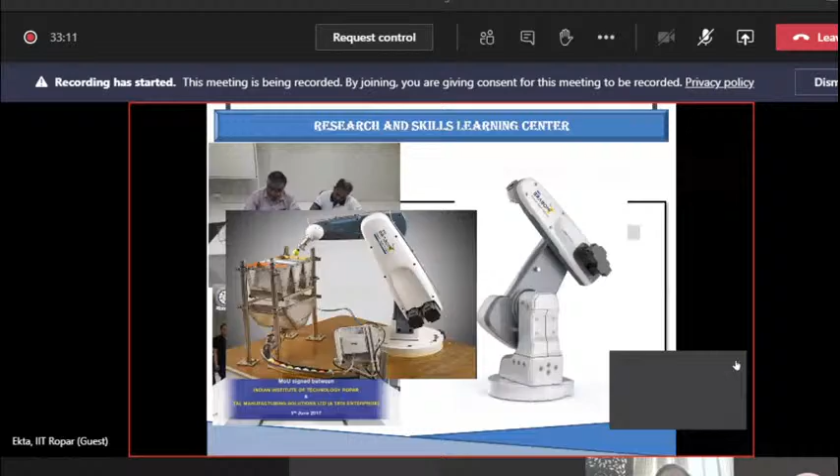So just one second. This will be a part of it, and this is what we'll be discussing for today's topic, and that is related to non-repetitive tasks. Because till now, I'll just introduce that normally robotic manipulators for the last four or five decades, if we are not taking only Indian robotics into account, had been started mainly for repetitive tasks, right?

That is one of the reasons. But now for customization, for non-repetitive tasks, for flexibility to be incorporated, which is related to Industry 4.0, there the importance of modularity is there. This is what we'll be discussing in detail. And I also work with hybrid manipulators, and have just started working on intelligence, whether artificial intelligence can be incorporated in all these projects. So this is some research direction, and just one or two videos.

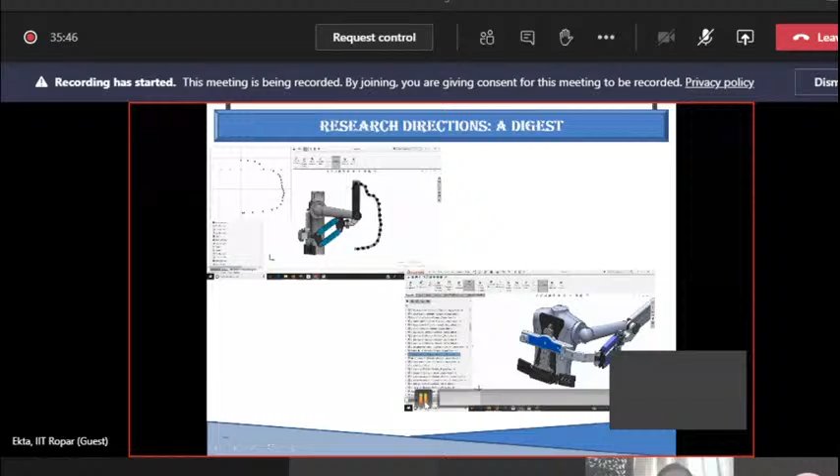And to introduce today's topic in a better way, before going into the introduction part, I'll just show you a glimpse of very recent work being taken up by my PhD student. My first student passed about 3 years back, and he started with modular robotics, and now he is at the University of Leeds, settled after his two postdocs. Then it was taken up by Anubhav. In between, other PhD students are working, because presently I have 6 or 7. But this was started with my first PhD student and now Anubhav is almost closing it.

I'll show the complete video at the end because we'll be talking about it first. But this is all in serial manipulators, so this is not related to hybrid yet, but how we can actually work with it. So I'll just show you some glimpse of where we'll reach today. So in the beginning, yeah, here.

For example, if there are some unconventional parameters, then we can always look for some specific customized robots and how we can make them. So this thank you is actually after this entire video, but we'll come to that. This was just to show you the glimpse of that particular video, which you can understand and admire in the last. So to begin with that,

let us talk about where robotics started from. In all our very established books and definitions, we talk about the repetitive task being one of the basic features where robotic tasks in manufacturing had been started. So you can say particularly Industry 3.0, where it's not that Industry 1 or 2 didn't have automation, but Industry 3.0 was particularly related to robotics research, that is, robotic manipulators which came into manufacturing.

And particularly the reason was that if we have some very difficult tasks, dull repeated tasks, something which is extremely dirty, unhygienic, or dangerous, for all those things, using manual manpower for such repeated tasks was not so recommended. And there came the importance of robotic manipulators, which all of us know as industrial robots, be it welding or repeated pick and place.

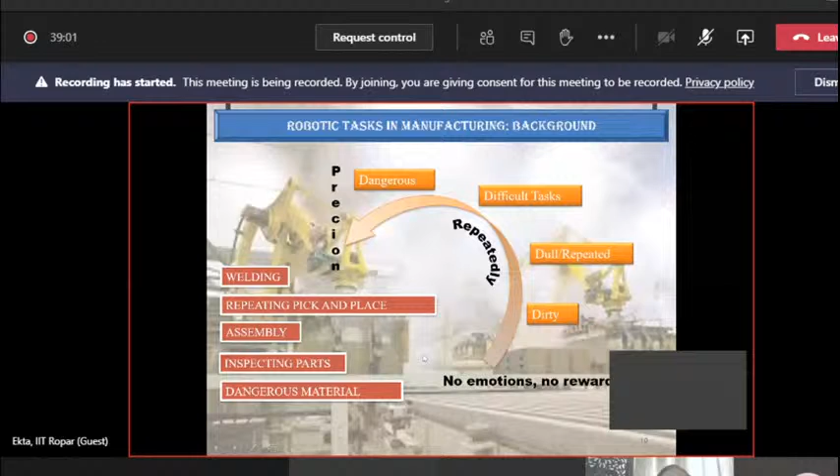So this is now textbook stuff, from four to five decades back, even more, outside. But for India, in the automotive sector particularly, it had been started long back, and we had imported enough robots. But I must say that even seven or eight years back, when I had a very good gathering at the beginning of my robotics platform, I'll talk about it, if you talk about Indian robotics on the global map, now it is increasing, but the relative number was so small that many people called it zero.

I know that starting from IIT Delhi, Madras, IISc, Kanpur particularly, and then Guwahati, we had many very good labs working. I am talking about a decade back, but still it was considered zero because the number was so small. And then I can use the word exponential change, and many people, many labs, be it startups or big projects or small projects or industry, have come forward now. I'll be talking about Indian robotics also for a few minutes in some time.

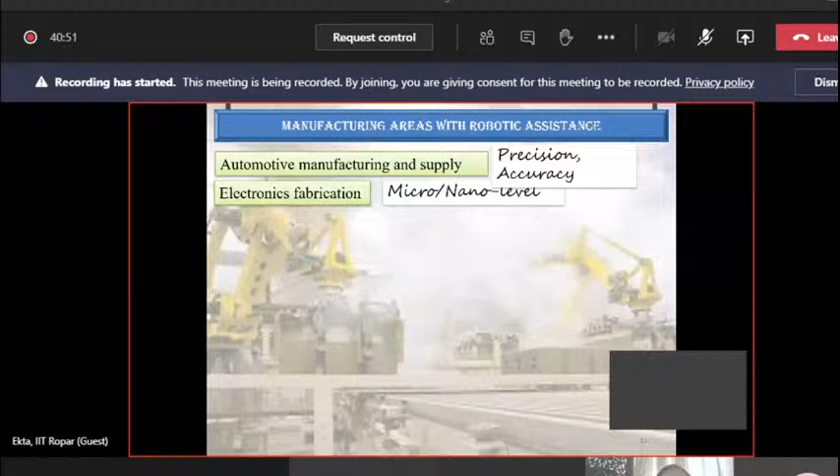Before that, just to introduce more about robotic manipulators, because today we are talking about serial manipulators only, for which during this entire course you might have learned about kinematics and dynamics. But why was it important? Because many manufacturing areas which need robotic assistance have different reasons. The automotive sector had started long back, and then came electronics fabrication, where precision was required to micro and nano level. Precision and accuracy are not the only reasons. I'm moving from repetitive dull tasks to other reasons which make the efficacy of robots better.

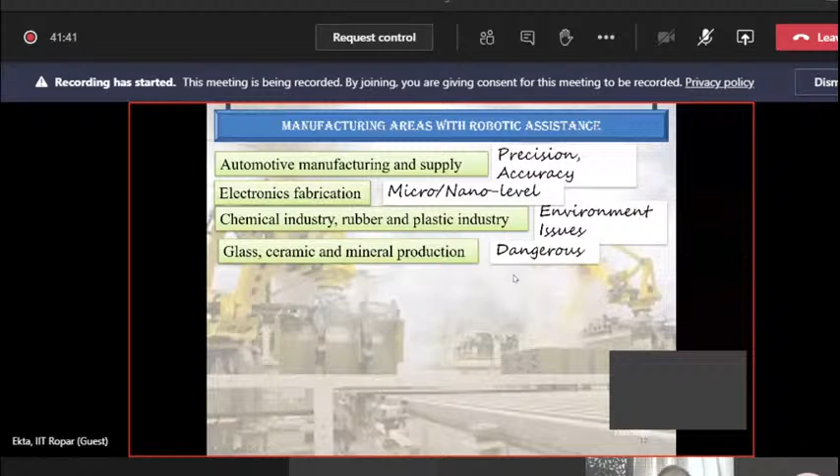So here you will see chemical industry, rubber, plastic, even very small firms; in fact, these days small and middle scale industries are also looking for robotics, not only for automation or precision, but for environmental issues, dangerous issues, for example glass work. And ceramics, these days robots are not being used only for danger, there are other reasons, equivalent to what I'm saying for wood and furniture: unconventional designs. This is another important aspect related to wood, furniture, glass, ceramics.

There you will find that you can go for unconventional processing using robotic arms, and that is the latest. I'll show it in a better way. Apart from that, hygienic and germ free, for example in food, small firms, everybody would like that rather than going for manpower, the human skills can be used better, and to utilize robotics.

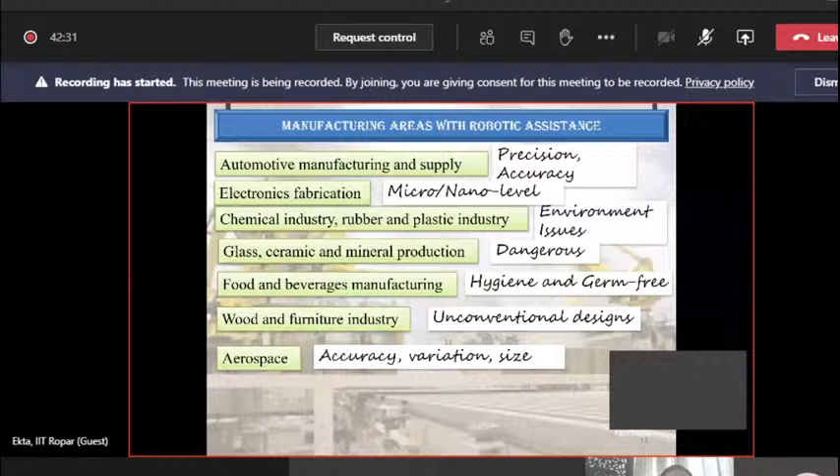So wherever actual food work is going on, that better be done in a hygienic way. The importance of robots you have seen in our present pandemic is huge. So what applications are robots in use today?

That is why I'm saying we should know and encourage Indian robotics. Apart from warehouses, not only mobile robots but mobile manipulators are being used. I'll show you the glimpse of it.

But other areas include assistive devices, maybe in building works, which is getting normal at places. It's not yet so normal in India, but you will find it very soon. And medical - you know it is being imported, but the utilization of robotic arms in medical has been seen by all of us. Then comes defense, service, and agriculture.

I have not shown my work in the last 2 years. I'm working in agriculture also, particularly in vertical farming. There also the idea is to use modular robots where, according to the different requirements of agriculture work in vertical farms, the location and space is less and the environment is constrained, so you need a customized robot, with the same idea and background requirement knowledge - just the application gets changed.

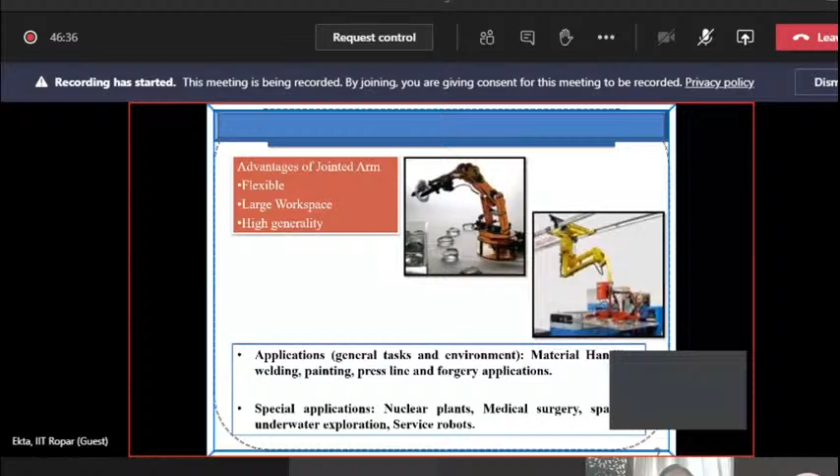Because now, with this introduction on repeatability, I'll explain what is meant by non-repetitive task and the importance of reconfigurability - that is what we'll be looking at. This is just the definition we had covered, and I would like to start from the concept and significance of reconfigurable manipulators.

The idea is that whenever we talk about a robotic manipulator, what is common in all these applications is the structure. You have already seen that your understanding of transformations, frame fixations, forward kinematics, and inverse kinematics shows that we can always design these multi-body systems in a very systematic way - first you see what is required, maybe given some 3 or 4 points.

You'll say you need a robot which should have - maybe you don't know the task, but maybe you know the DH parameters or specific parameters. Some people go for only Euler parameters, or Rodrigues parameters, or whichever parameters you use to define your frames. Normally used are DH parameters.

I'm sure all of you have already studied this and have hands-on experience with it. So what DH parameter does - it's a convention given by Denavit and Hartenberg - that convention is just to introduce or define our frames.

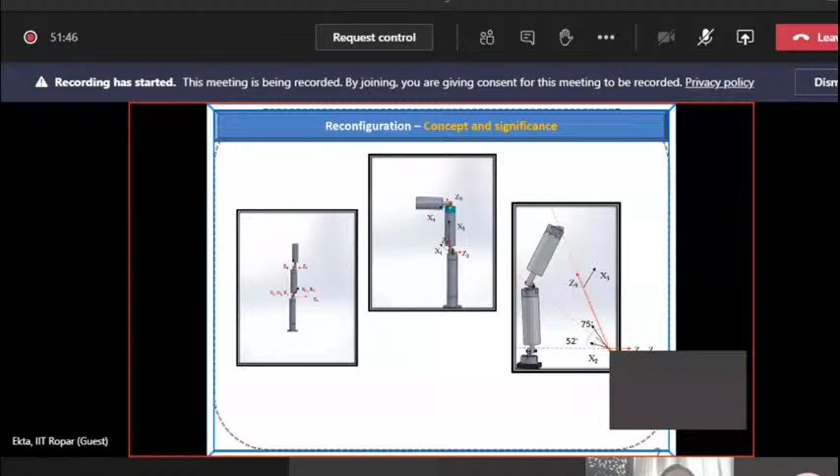Apart from that, I've also worked with cases where the connectivity between the Z axes or the twist angle is not 0 and 90 - that's what I call unconventional. I'll come back to this point. This was just the introduction - we'll be talking about how to get unconventional modules for any manipulator we want. But before that, I'd like to introduce many other modular robotic manipulators given by different industries and groups.

So they give us a modular library with active components and passive components. From the 90s this concept of modularity existed, but normally people from an electronics background were using it, and the sizes of these PolyBots were very small, so there was hardly much role of mechanisms - the heavy duty robots were not involved.

So similarly, M-Tran - these are just some of the options how people have tried their hands at research in modular robots, because this is the Atal course in which it is being mentioned for robotics research. That is why I'm showing this factor. Sometimes, just for the introduction of modules and my work, I skip it, but for this group I am showing it and some of the concepts, because then, even if you are from mechanical engineering, electronics, computer science, materials, or biosciences, you can connect yourself depending on your background, and see how you can contribute or work in this area if you like it.

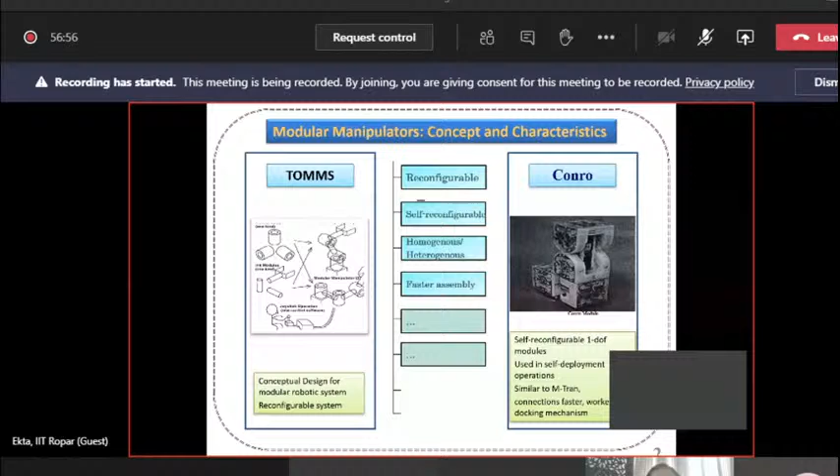Another aspect is whether the assembly is fast or slow. This is particularly related to self-reconfigurability, and whether it is self-repairable. For example, in Sambot, the modules are very small - equivalent to electronics parts - and only that much is required, and they can turn themselves and connect at any orientation. So if it has six faces, at any face it will connect to another and form a new shape, which we call a new configuration.

And then which part can be helpful in moving, which part can help even with stairs - if you want stair climbing, such modules people have worked on. It's not that they are ready, but this is another research direction, particularly people in electronics prefer this. And the controller, and more importantly the algorithms used for understanding the configuration it presently has, and the controller accordingly. So this kind of background work is required just to introduce to you the research robots in this area. Multiple modules can be attached.

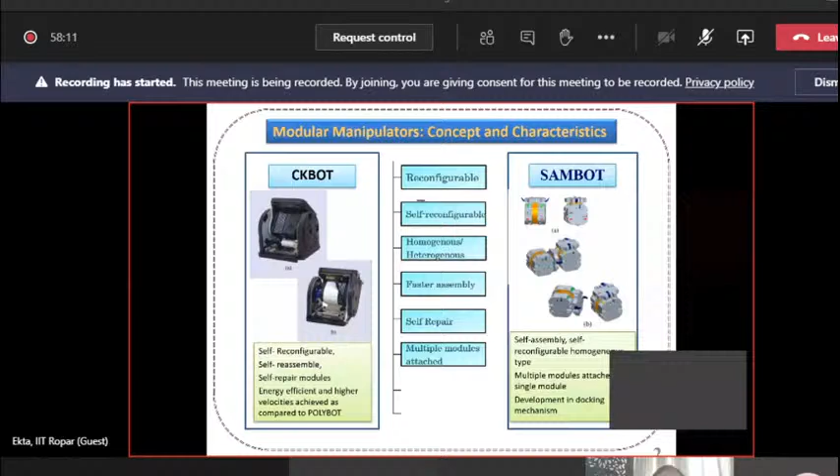So these are a few of the aspects in this concept of modular robots. And one of the other aspects, as I said, the last one I have added, is the degrees of freedom. Till now we were talking about each joint being 1 degree of freedom. Normally in our serial manipulators also, we assume that we'll take every joint as 1 degree of freedom.

But here you'll see that in this SuperBot concept, each joint or each particular module which they have made itself has 3 degrees of freedom. But increasing the degrees doesn't always mean good. So my point is, if required, this is another example.

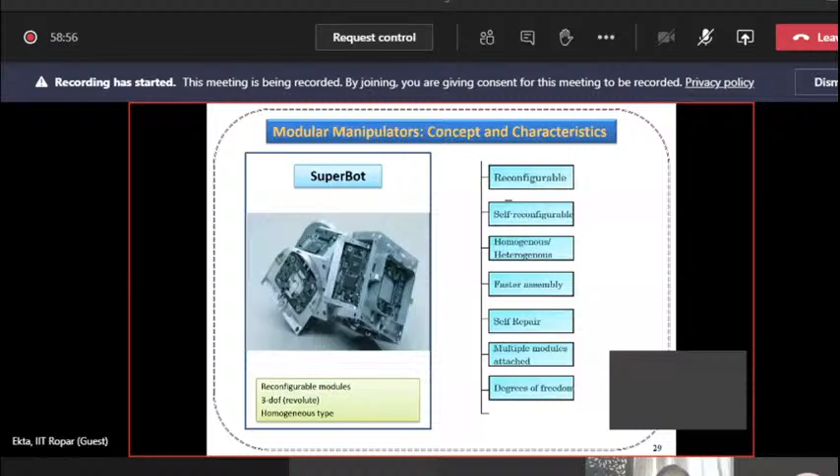Okay, so what is the importance of robotic arms, right? Why was that required, and the introduction towards my work. As I said, this was all to show you that it's not a very recent concept, even from the 90s. So this is coming from more than 2 decades. But what is recent is from the last 1 or 2 decades, particularly in heavy duty robotics.

As I said, all these were small in size, because the moment you have heavy duty, you can say, okay, there is a large link which is carried by another link. You have to think about all the inertial forces. In fact, when we are talking about dynamics, I don't know the way you had already taken the lectures, but by the fourth day you might have got introduced to dynamics.

A small change here or there in your masses completely changes the dynamics, and then how can we talk about configuration, and who will control it, who will write the dynamics, who will write the new kinematic model of it, right? Everything needs to be written again, and that too automatically. Only then it is reconfigured. It's not that you can just put the components in a different pattern or order, but you have to take care of all this modeling, be it kinematics or the dynamics of the system.

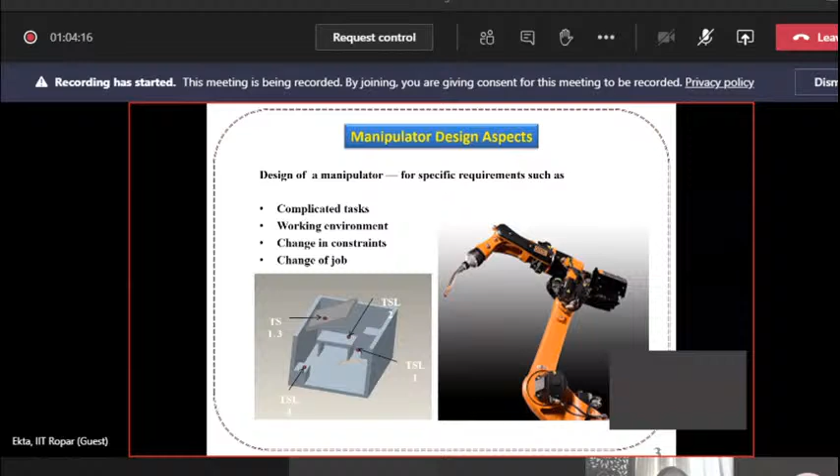So this is another example of the same design for cluttered environments, and you will find realistic environments here at the left side. I'm showing you this just because this was all from the lab work itself, taking the structure or the environment of the lab itself, one portion of the lab, as the example, right?

If we say we have modeled this, in fact, these days, one of my works is related to the modeling part of it. I am connecting this work with people who are working in computer sciences and algorithms, because of how to convert the videos or the pictures taken from the camera, in picture form or any frames, right, into the model as required for these 3D models directly.

That is, I'm not talking about going from scanning to the model. I'm talking about going from the frames, the 2D frames, to 3D modeling. So these algorithms are there with the computer science guys, or even my student who is not from computer science learned those, worked very well and associated this to our robotic system. That work I'm not presenting, but I'm saying how your learning can be utilized in this area.

So here, for example, this model we prepared long back, about a decade back, but now we are making such models not by simply calculating the dimensions and then going for assumptions. That particular part can be skipped by utilizing advanced technology to convert in seconds, or maybe minutes, or maybe half a day, depending upon the complexity of the environment.

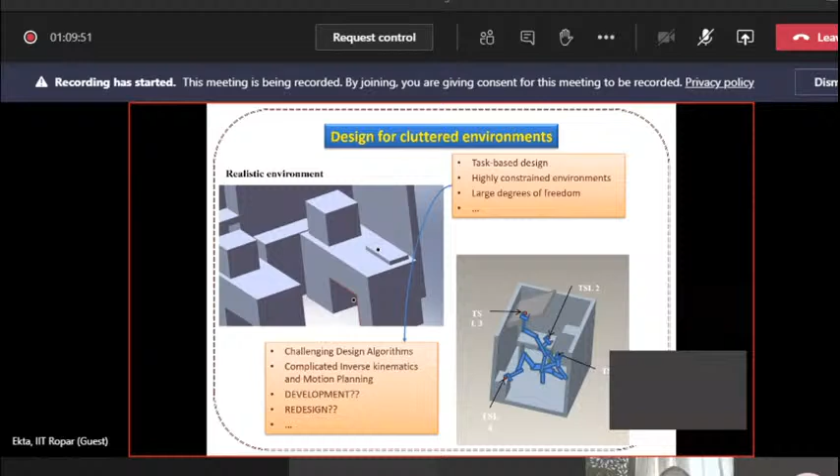So this is where I would say the importance of a library being developed in hard form, I mean not the simulation, which will correspond to what is being designed. You should be able to use those modules which are present in the library and actually make the prototype ready. So this is all the concept, and this is where I would say that particularly you can break.

Now, modularity doesn't mean the entire module can be developed once. You can talk about the library having different parts. You can actually further connect, break it. So these are just to show you how and what parts will be considered the individual parts, the components of that library. That depends upon, again, the requirement and the flexibility which we would like to incorporate,

because we also understand that there is a trade-off here, that more flexibility may hinder the rigidness, or it may not be as stiff as required in the industrial arm. So we are not saying for very heavy duty you may need it. There is a trade-off here, and so this was just to give you a few concepts, particularly related to the introduction and the requirement part of robotic arms, why modularity is being used.

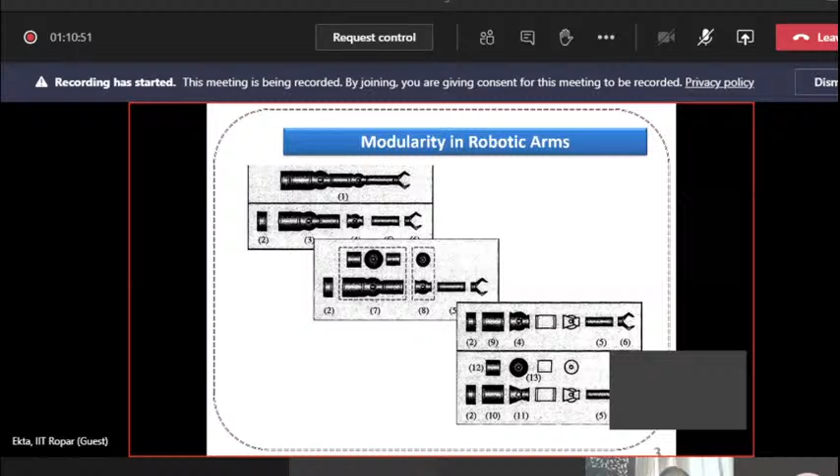So before going further, I would like to take some questions, because I've gone a little faster. So before going to another part of it, may I ask how did you find it, and if it is connected to you or not? Because I have a lot of time, I can always ask my audience if it is going okay. Yeah. Shall we ask for some questions? Am I audible?

Yeah, Dr. Ashwin, first of all, may I know if I'm audible, because I'm sitting in a room and I don't know. Yes, ma'am, you're audible. Okay, all right. So that means at least I can go further if there is no question.

But you can relate it to your work. It's not that the question has to be from this work, but you can also talk about what particularly you are doing, and would you like to connect it to that? Only then this version of mine will be useful, because I'm not giving any details of how we have done it, but what you have covered in the last 3 days, maybe that will be utilized here, right? And as I said, it is important because of possibility, and if we are talking about possibility, then many questions come. But if there is an interaction required, anybody who's getting any question in mind.

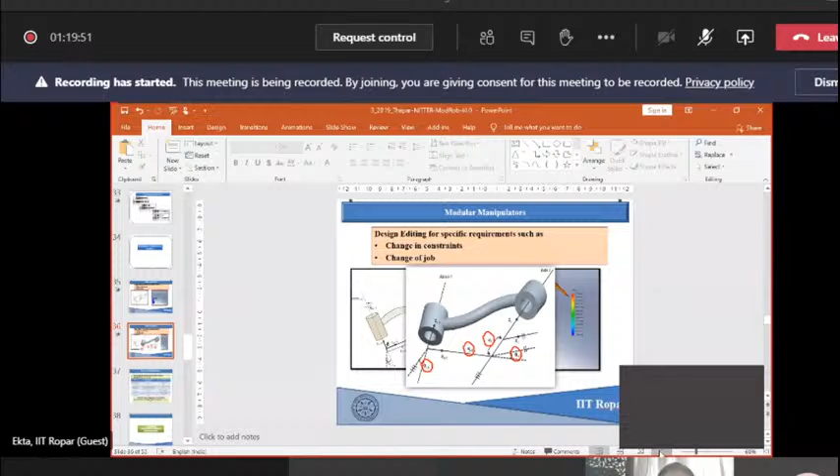So I just go back one or two slides. It's good that I spoke mostly about these DH parameters. Okay. So we were here, and what we talked about is the same, and which you have understood, that particularly for changing the configurations, it is important to see whether it is really possible or not, because we talked about many things. We talked about the requirement that wow, it will be so nice to have a new configuration, but will it really be possible? And to talk about that, we showed you this particular design editing.

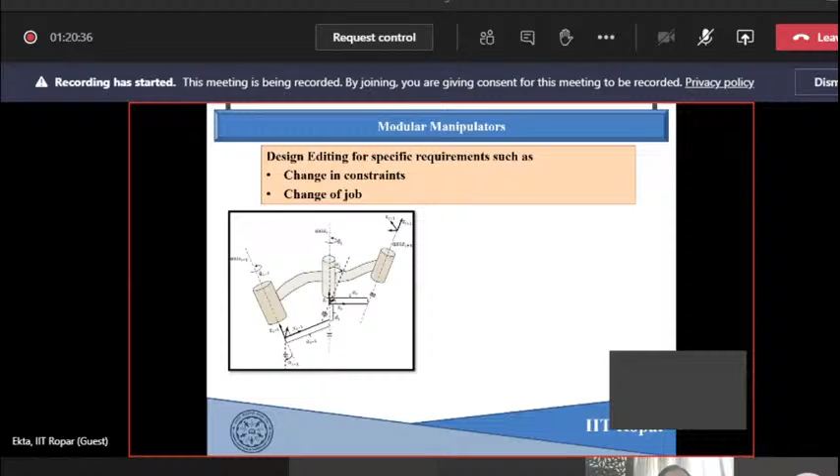And here you will see that in particular to make any robotic arm, for example here at the right side, as I was talking about these 8 degrees of freedom, right? So this 8 degrees of freedom robotic arm, we just made it, and it's easy to simulate, at least till simulation. And we assume that some similar or corresponding library is already developed, right? And out of that library, many people are working these days, even on modules people have started working, but the idea is how you have designed the modules.

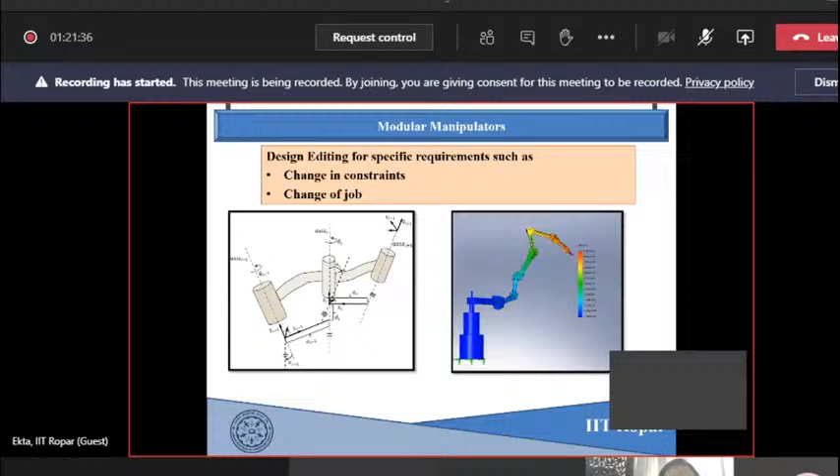So the possibility means first is kinematics. First is the kinematic part of it. That means if I can give the modules which can get connected to each other, right? To give the DH parameters, now I'm confined to the DH parameters only. And of course, you can develop, as I said, for other parameters also, right? But these are generally being used, so we can talk about this. And if we see the DH parameters, then the DH parameters are these four, right?

And in this, say, alpha as being marked, and a, which are link length and twist angle, they are talking about how any specific axis is associated to the next axis. That is the consecutive axes for the two joints, how they are connected. What is the definition of one with respect to another? So for that, you use the distance between the two as well as the angle between the two with respect to the x-axis. So there is a specific convention which helps us to define the two axes.

Similarly, your joint offset as well as the joint angle. This helps define how the x directions of the frames, x i minus 1 and x i, are associated or defined with respect to each other. So these four parameters help us to define a complete link with its joint with respect to the next link or the link prior to it.

So if I can create the modules, say this picture is not for the modules. This picture is very common where people learn DH parameters. You might have already done it recently, right? Or even long back. But if I say this is my module, although this is not so nice because it cannot change, it looks very stiff and rigid. And if today I say that, you know, whatever is this alpha, the angle being shown here, and I... arrow option. Okay.

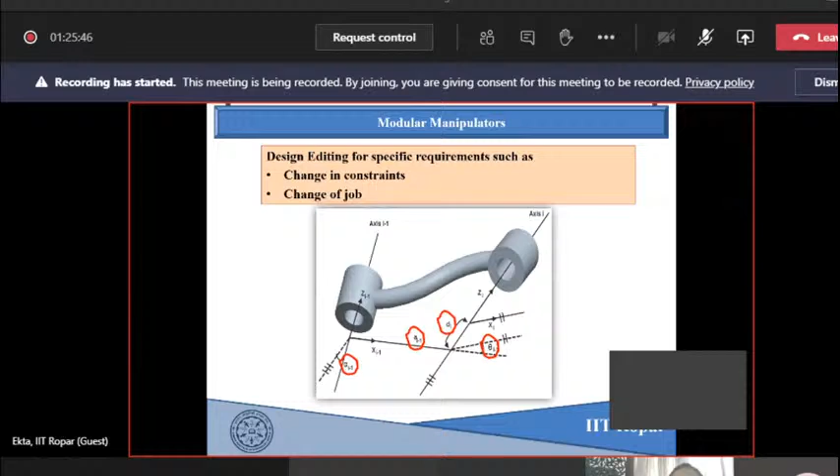And all these things come into the picture when you start working on the statics and the kinetics of the system, because the static force or the dynamic force balancing, everything gets changed the moment you make a slight change in the dimension, or the complete formation. So how to handle it? There you will say that flexibility should be minimum, and we found that only by playing with alpha we get enough of such modules. And some other works, just the key points, or some other ideas about modular manipulators, I'll show you.

If we are talking about the conventional and the reconfigurable, at least from the kinematics part of it, why are we talking about reconfigurability? Again it's the relation with the requirement. With conventional you have some specific configuration fixed for you, and in the second you can change the configuration according to the DH parameters. Then the first thing you get is that yes, reconfiguration is possible here, and in conventional you have to change the complete robot, right? It's a fixed configuration, so it's not possible there.

I'm talking from the perspective of why it is trade-offs. It's not that okay, we should switch to the reconfigurable. No, you cannot, right? Overall mass, normally, unless you get into further research on maybe materials, or on actuators to make them lighter, right? Because if lighter actuators are being made, that means even the conventional robot can be lighter in weight. But overall mass normally for the reconfigurable will be larger.

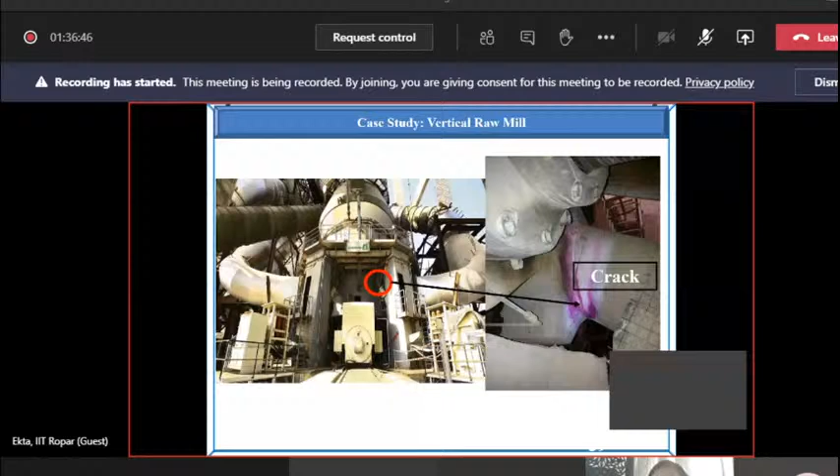But the point is, if we have a library ready, it can always be adjusted on a hydraulic lift, as I'll show, and the manipulator part can help work in any such direction. So the customized manipulator needs to be developed according to the given task, and there were two tasks there, the crack at two locations.

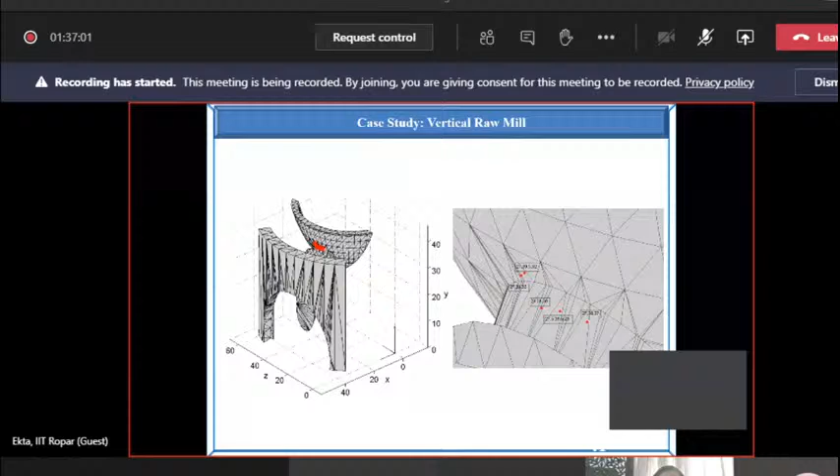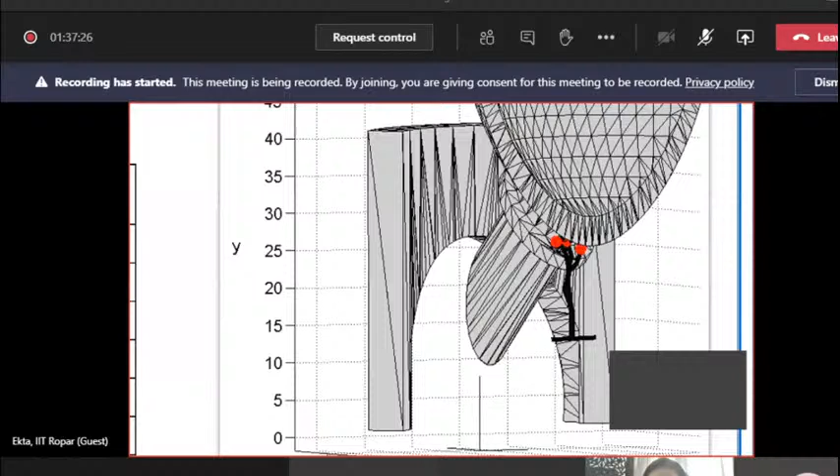At one of the locations, these are the DH parameters we get. You can see these black lines being shown, zoomed in because it was a very large profile of that particular location. In front of them, the robot being designed is already at height, and there were red marks showing the locations where the robot needs to work, and the DH parameters which should be helpful. You'll see alpha, A and D values coming up, but who will understand it like this?

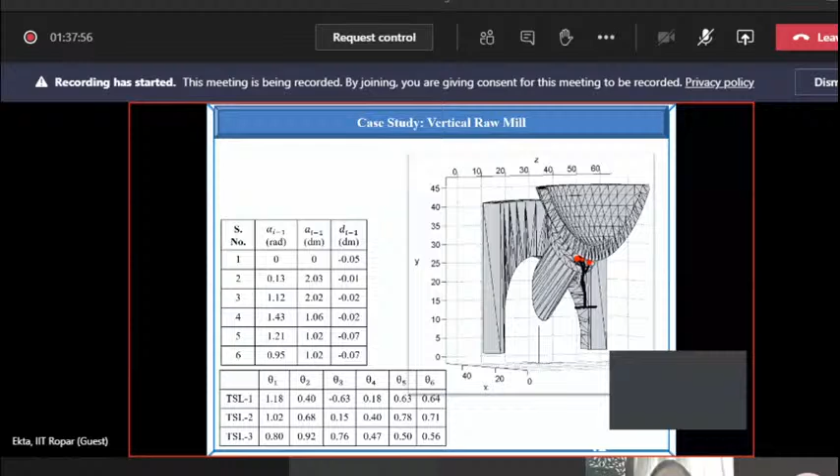When working at the front side, the requirement according to complexity was different, and when working at the back side there were further constraints. Because of these further constraints, you need extra degree of freedom, and that is why at one you have one configuration, and at the other side another configuration, and they can connect. I'm not saying today's technology is so developed that quickly it will be connected, but with better research, we have already developed such modules which can be connected.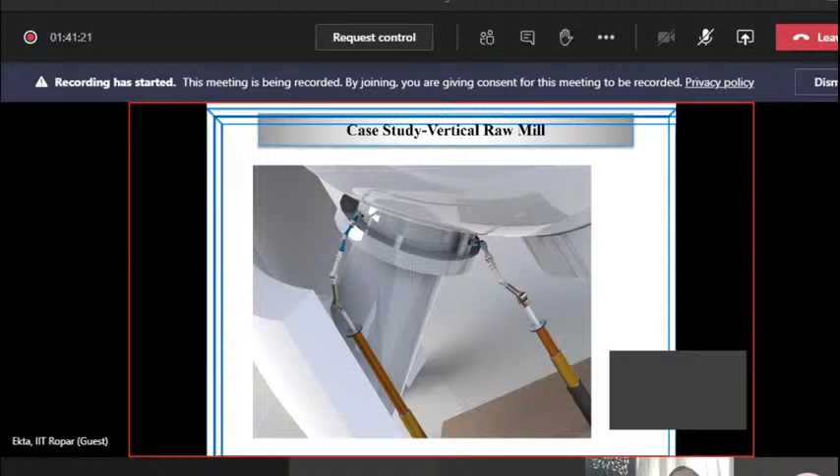So this is about the introduction of the modular robots. But now I'd like to cover a little part from its connectivity, because whatever I've spoken, all those terms are the takeaways for today. But this is how it's connected to Industry 4.0, because as I said, robotic arms to begin with were associated with Industry 3.0, but now with this new era already here, what is the meaning of modularity?

So whenever we are talking about cyber, with that we have associated the cyber physical systems. It's not that current research is only in the algorithms. Mainly in industry, what you need is adaptable algorithms to connect the processes or their inputs and outputs, with respect to controllers as well as everything from a distance.

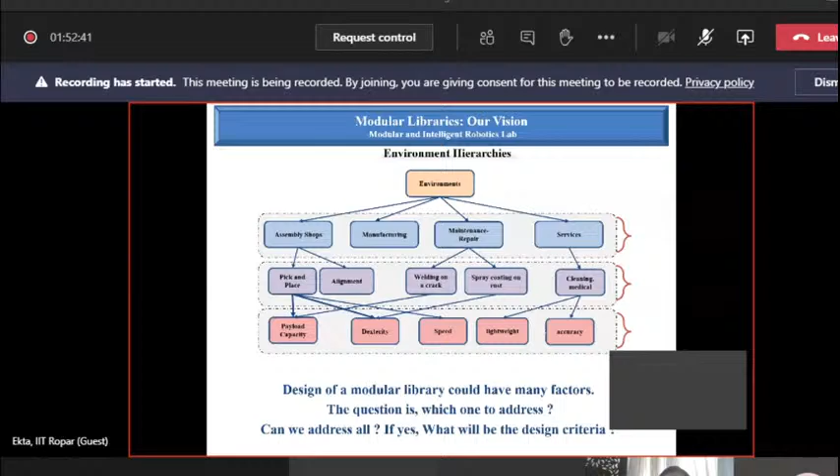And now I show this video, which I told you about, almost everything I spoke of. In just a couple of minutes you can see this, because this is from our recent work using the Robot Operating System, the ROS environment.

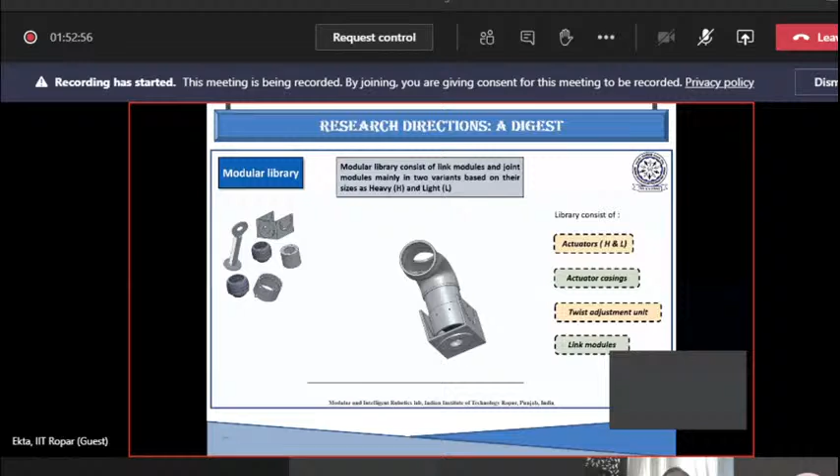I'm sure you know it, but please train yourself and your students on ROS. We are also learning, and we are arranging different workshops for ROS, which is required for global working.

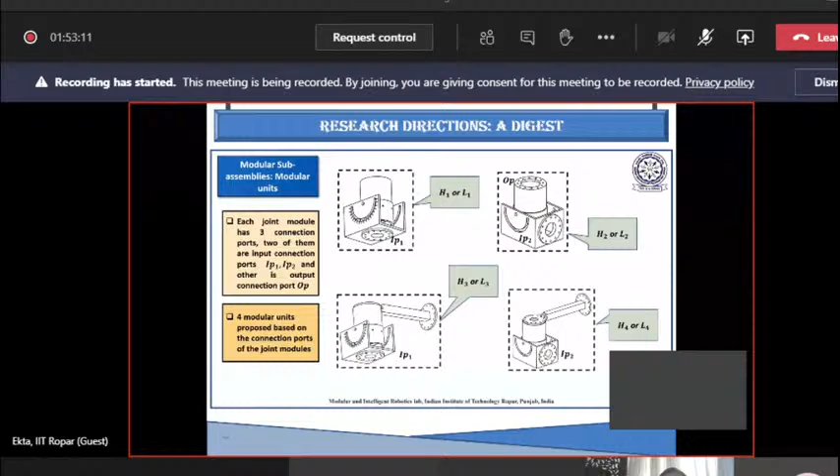You will see that H is for heavy duty, L is for the lighter, and how we are developing the DH parameters first, then adjusting the twist angles accordingly. Then the modular sequence is being designed, and this is all being shown here.

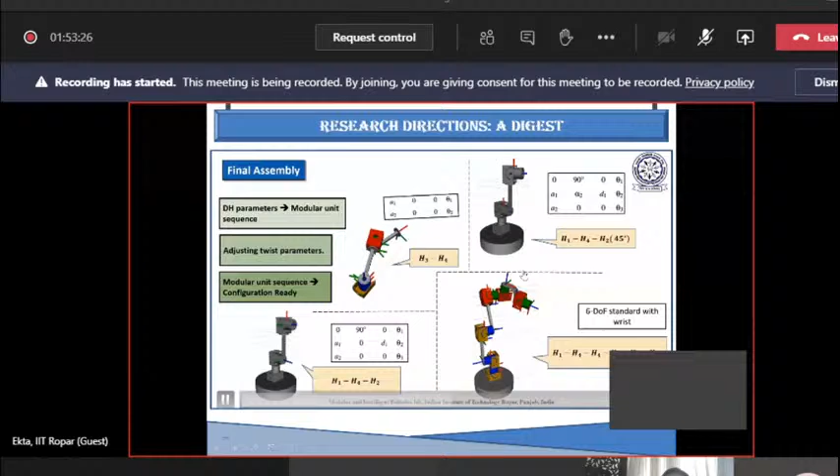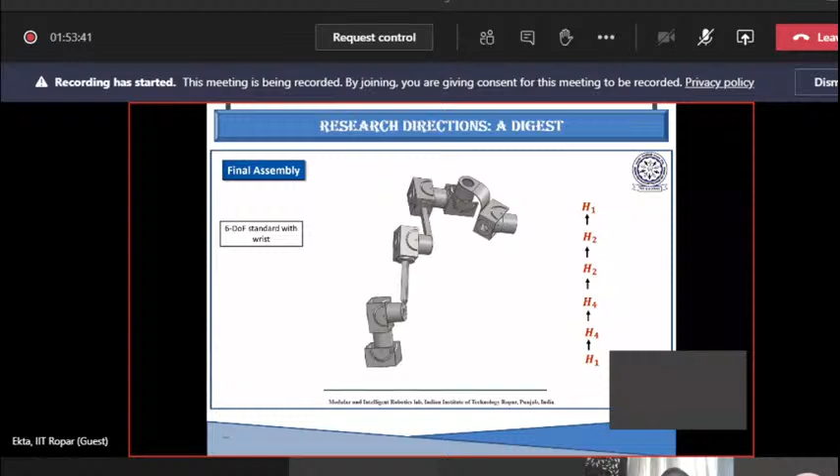So this is actually heavy, H1, H4 - these are all names given in the robotic system itself. This is our work from a couple of years back, three years of work actually, in our modular robotic systems, particularly using ROS.

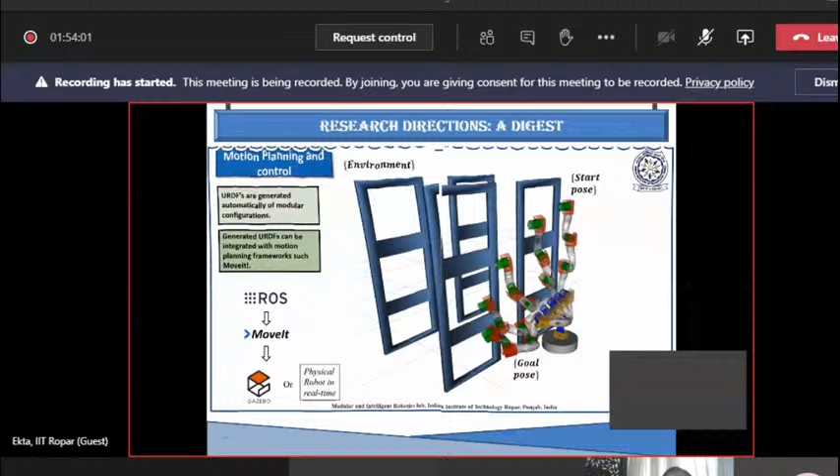This was just a short video for recent times, to give you an idea, and the closing of this particular lecture. So with this, my discussion on the given topic is over.

I also want to tell you, because in the beginning Ashwin introduced my platform called Punch Robotics, and I always talk about it. To know a little more, you can check the webpage as mentioned - it's simply punchrobotics.com - and you will find that we are trying, for the upliftment of robotics.

At least in your institute and around, or whichever contribution way you feel is correct, you should try. In that direction, this is our contribution, where we feel more interactions and discussions help improve our work. Somebody who wants to connect with us can write to the contact listed at punchrobotics.com.